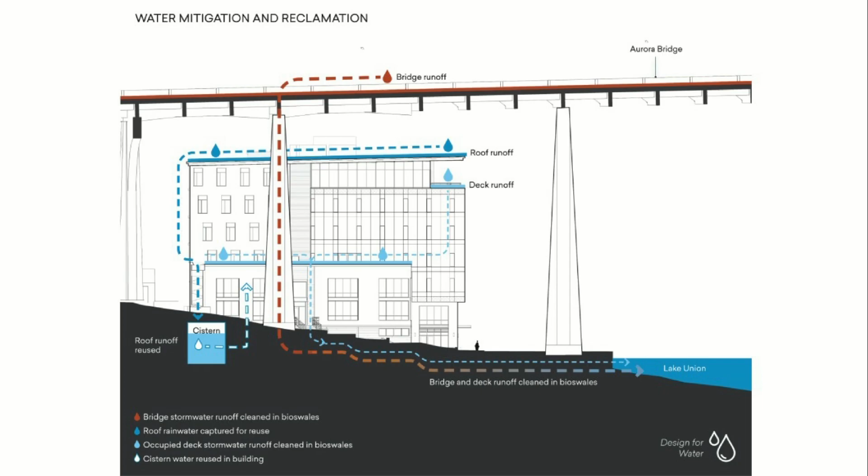So this is a diagram of water mitigation and reclamation showing the bridge runoff as well as deck runoff from the building entering these bioswales before entering the lake. This diagram also shows some of the water strategies in the cistern as well as some other sustainable building systems like beehives and operable windows and highly efficient mechanical systems.

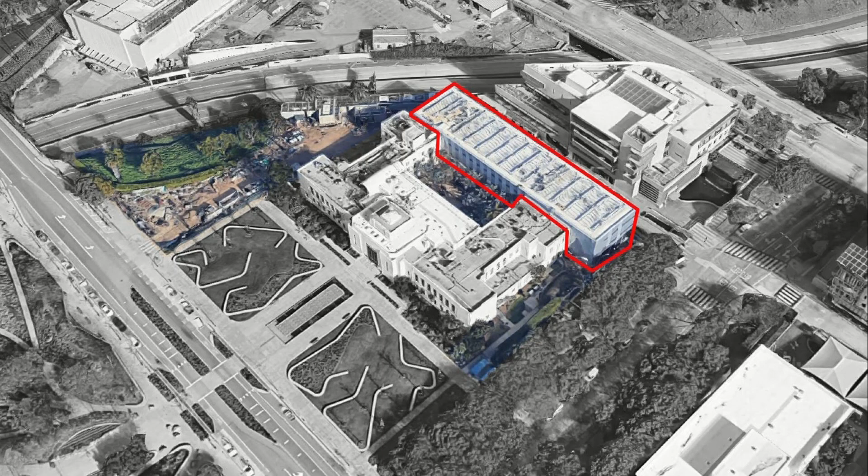And then closer to home, we're looking at Santa Monica City Hall East, outlined in red. It's a 50,000 square foot, 3-story addition to the historic Santa Monica City Hall. It is fully living building certified.

So that means that with regards to water, 100% of the project's water needs must be addressed on site. So it's all through rainwater capture and infiltration, as well as no potable water being used for non-potable uses, and all gray and black water must be managed on site.

These rigorous standards really pushed us to become the first in California to be permitted to convert rainwater to potable water, and also the first building of its scale in California with composting toilets. So this shows our pathway to get to net zero water. I think you really see composting toilets and rainwater capture as being really integral in that story.

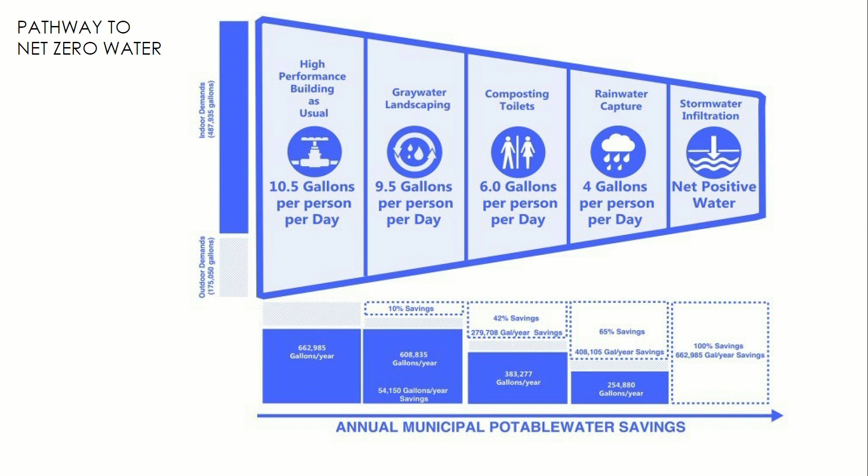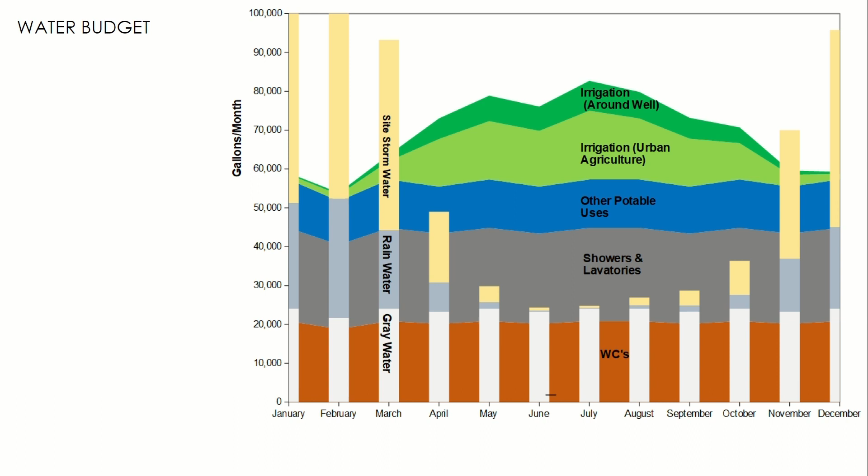And then these two graphs, this is sort of the before. So you see on the y-axis the available water - site stormwater, rainwater, and gray water. And then on the x-axis, the demand of toilets, showers, irrigation. And then once we take the toilets out of the equation, we start to get to net positive water. So for this project, the composting toilets are really the unsung heroes of the project.

So here, if you ever have a chance to go to the building, definitely go to the bathroom. The toilets are really fun, and they all stack vertically into these composters in the basement of the building. This is filled with worms and other organic matter that's turned over and eventually goes into an autoclave, which then deems it Class A compost, so you could use that for gardening.

So I think these two projects show us how challenging ideas of what infrastructure means, as well as what buildings can do, might not just be bad, but actually do good.

So they are capturing the rainwater that then goes into a below grade 40,000 gallon cistern, goes into the water treatment room, and then becomes potable water for the building.

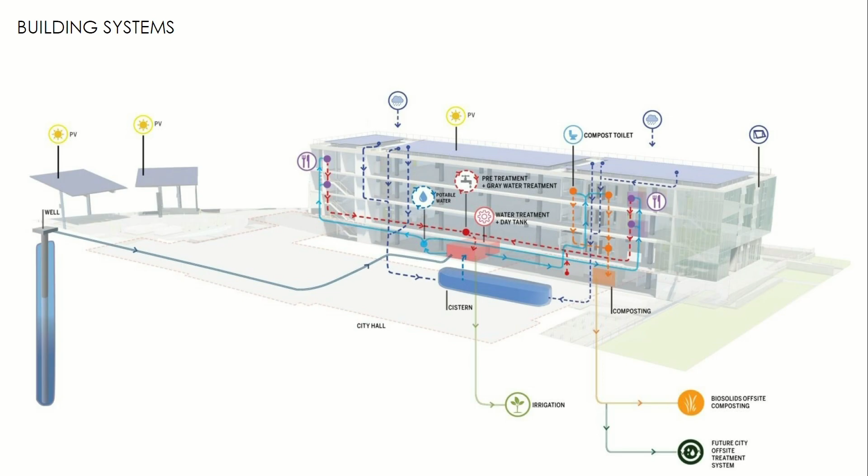All right, so now zooming to a different scale, going to Singapore, we're looking at a building that starts to think about water as poetry, as a phenomenon, as an icon. So this is the Jewel Changi building in Singapore.

It is 1.4 million square feet. It combines the programs of an airport transit hub with retail, with a botanical garden, and its centerpiece is this rain vortex. It is the largest indoor waterfall in the world, 130 feet, so like 7 stories.

Great for Instagram, and in plan and section it really demonstrates how the architecture and the landscape are intertwined. So you can't really imagine one without the other.

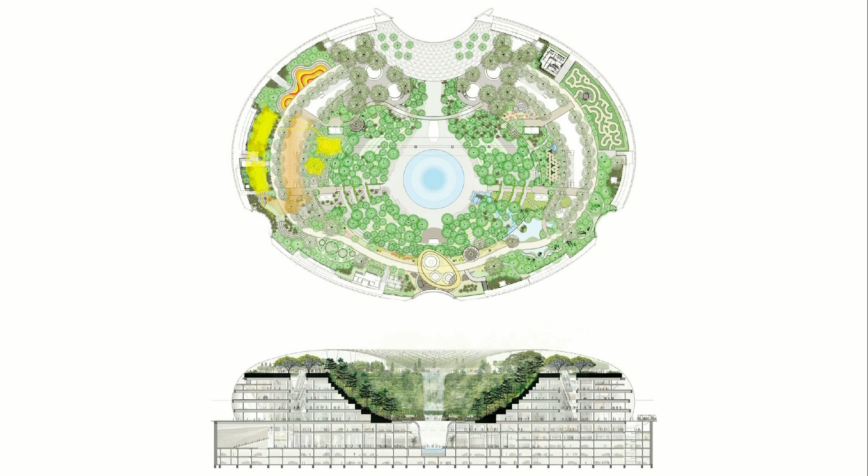So the way this works, it's recirculating rainwater. It's pumped to the roof and then free falls through this hole into a reflecting pool in the basement. And the ebb and flow of the waterfall goes to a trickle, and then at its greatest, it's about 10,000 gallons per minute.

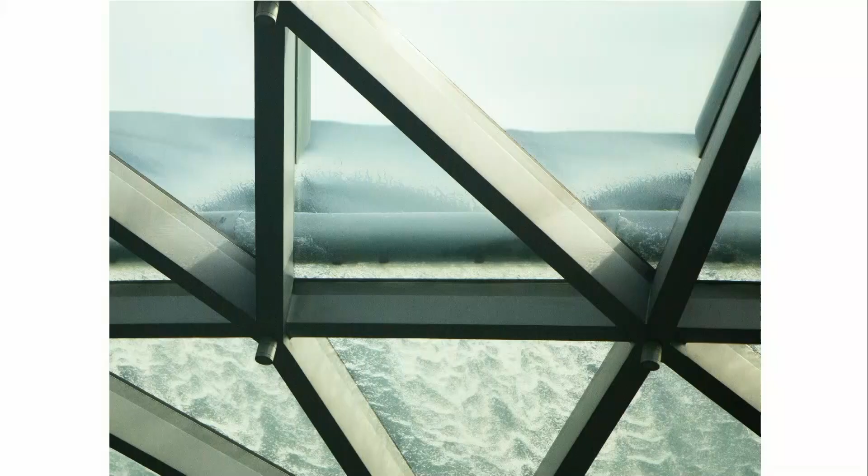This also aids in the cooling of the landscape environment and collects the rainwater again to be reused both in and around the building. Here's a detail of the facade.

So there are structural features built into the facade as a network of pipes and fins that then collectively gather the rainwater into this oculus and then distribute it perfectly into that circle.

This is a $1.2 billion structure. It really demonstrates, again, that poetry and universal quality of water that we all are attracted to, right? And it's collecting 50% of the stormwater runoff for irrigation and toilet flushing, and then the water is cooled enough that it can feed into the central plant to lower the ambient temperature of the building.

And then the last two projects address water as nourishment and sustaining us. So Vertical Harvest has locations in Wyoming, and then soon Maine and Michigan coming online. This one is in Jackson, Wyoming.

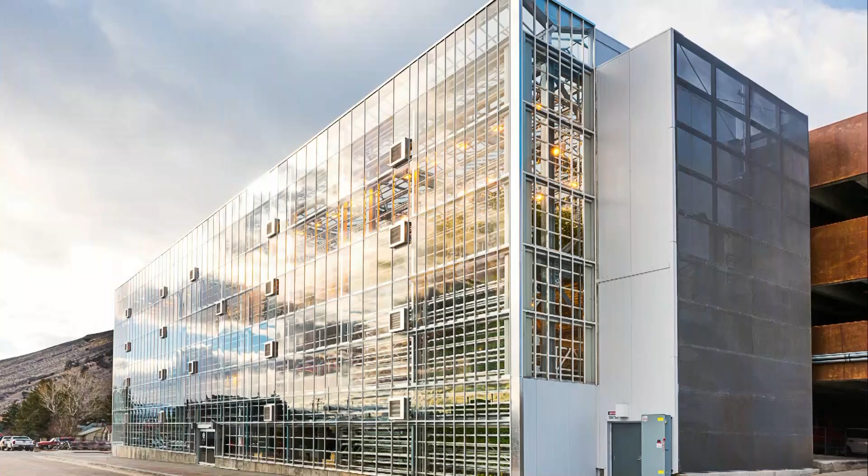It's a 30 by 150-foot lot next to a parking garage. It's the first vertical greenhouse in the Northern Hemisphere. And they've been in operation, I think, 6 or 7 years.

And they supply grocery stores, restaurants, and 3 states, producing food 365 days a year, despite the growing season being about 4 months in Wyoming. And they replace 100,000 pounds of produce that were formerly trucked into the community.

So this business model really challenges the notions of land use and what a farm is and what farmers look like, right? Half of their workforce is hired with disabilities, so that's another win.

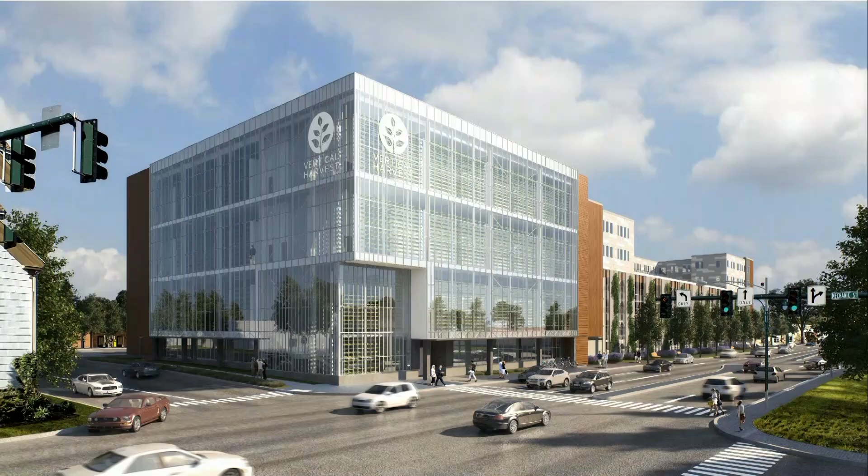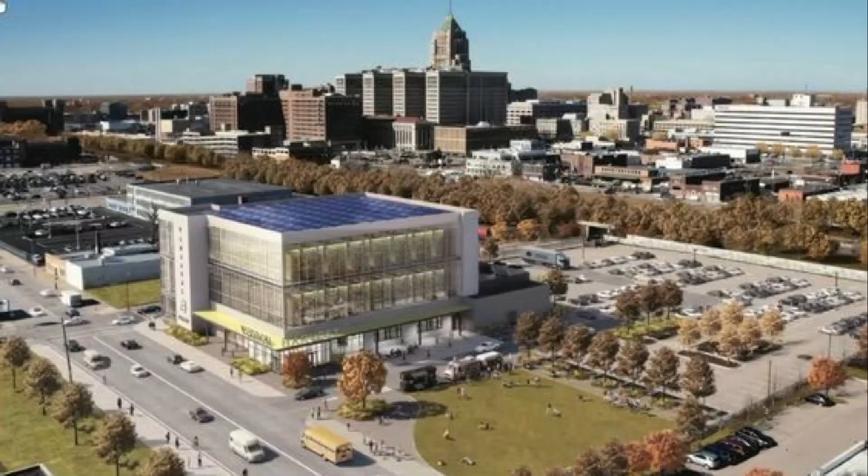And they're expanding their model nationally into other food deserts with similar short growing seasons. So near Portland, Maine, this is a 52,000 square foot facility set to open any day now, I think, slated to produce 2 million pounds of produce annually, providing food to schools, hospitals, and markets. And also in Detroit - this is really bad quality - 60,000 square feet and also about 2 million pounds of produce.

These projects really highlight that most of the produce we consume in grocery stores was harvested in a different country or state. It comes to us on a refrigerated truck, usually weeks after it was picked, so the nutrient quality and taste are diminished. But when you pick something and eat it 24 hours later, it's a win-win, creating year-round food production, local jobs, and reducing the carbon footprint of our food. With our growing population concentrating in urban areas, I think vertical farming is a really growing and exciting model.

Last project, similar themes but smaller scale and closer to home, is the Degnan Micro Farm. This is one of three micro farms that are part of Crop Swap LA, an agricultural institution whose mission is to grow nutrient-rich food in unused spaces like front yards. This one is a single-family lot, 150 by 50, and the story of the garden is in the backyard.

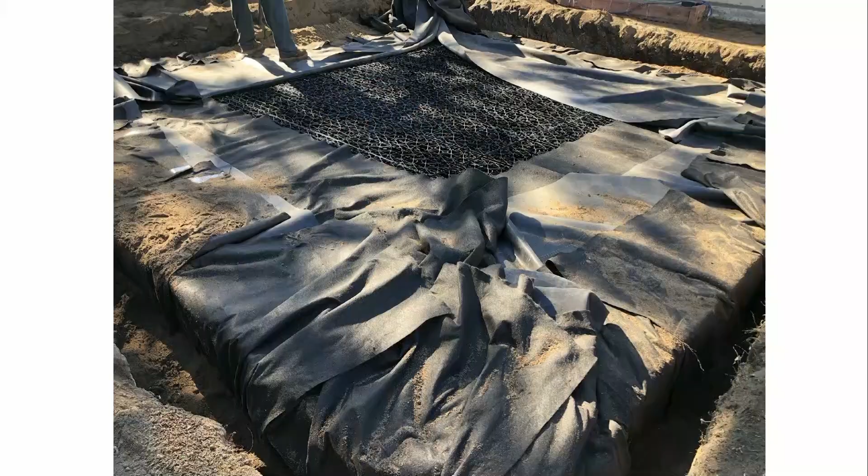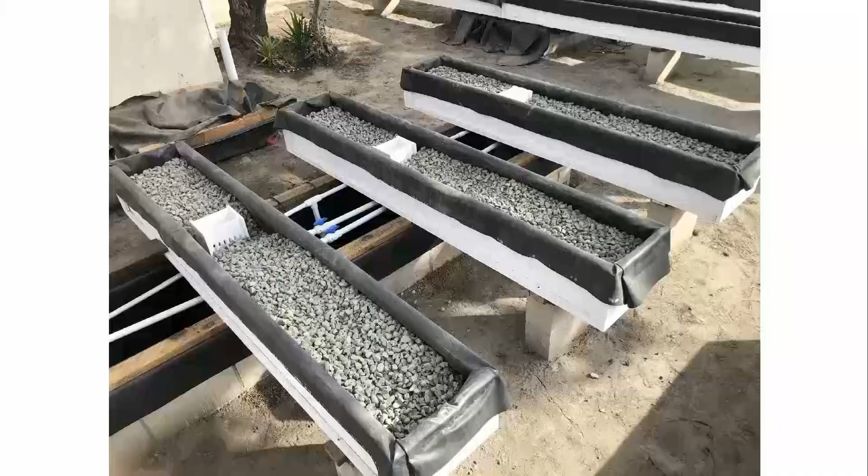They collect about 5,000 gallons in this below-grade reservoir, and above grade they built a recirculating waterfall filled with plants, lettuces, and pavers with permeable gravel that also collects rainwater from the property's garage and house. Then in the front yard, you see the terraponic system at work. So the whole farm, both this one and the other two, use recycled water and are solar powered.

Here we see these cinder block reservoirs with, perpendicular to that, the terraponic system. Terraponics is like aquaponics, but with soil, so you're getting the biology of soil together with the nutrients of the water. I think you can grow more plants with this system than aquaponics, and it's a little bit easier for less experienced farmers to grow with.

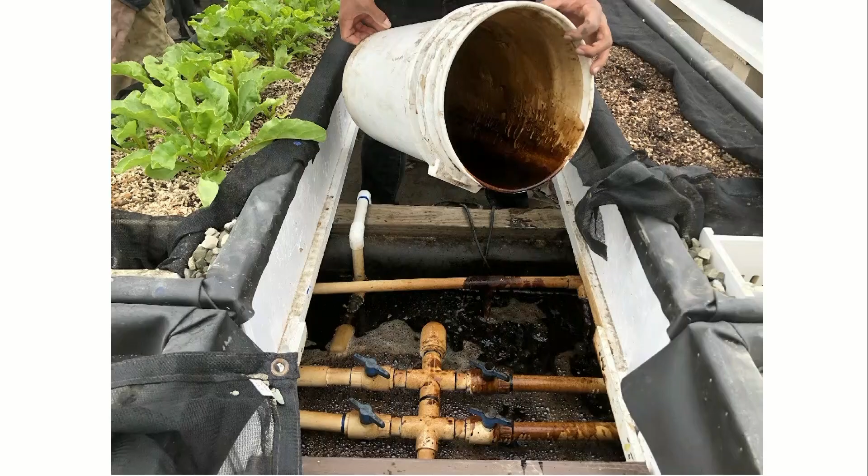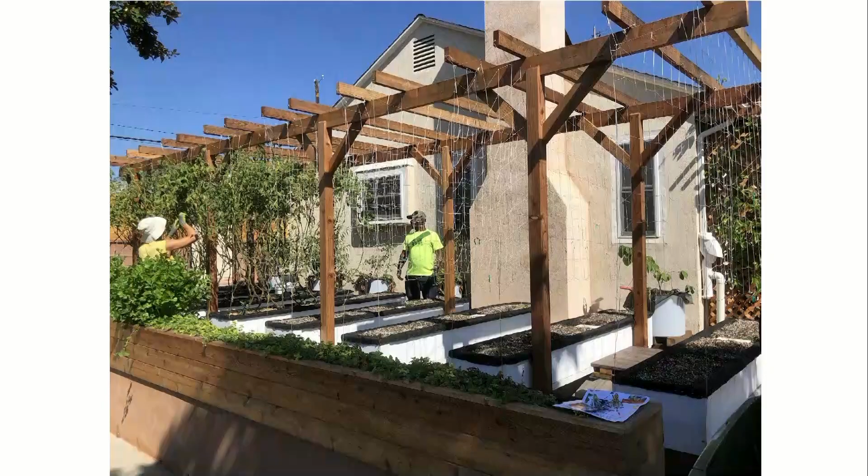In between each of the troughs, there's usually a cover, but here you can see the irrigation system as well as how they supplement with different plant-based fertilizers so they can calibrate the nutrition to the plant, both specific to what's being grown and where it is in its growing cycle. This is that same system, now with the vertical trellis.

Below, there's about 780 gallons of water being recycled, and it's always being tested to make sure it's appropriate. Also making more use of the vertical space in the front yard, they have this whole system made from reused rain gutters. It's about 8 feet tall, with I think 30 runs of it. This is where, right before harvest, we see lettuces, kale, and eggplants all growing.

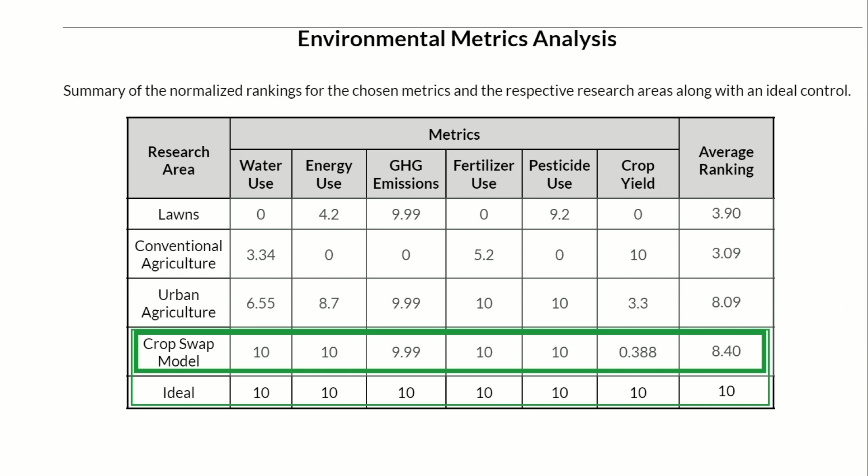This farm is producing food to feed 45 families, all within a 1-mile radius of the home. These are some metrics comparing the project, the farm, to conventional agriculture and urban agriculture, as well as comparing water needs between the microfarm and a conventional lawn. So it's kind of night and day.

So yeah, these 5 projects hopefully get us thinking about what we need our built environment to do, what our infrastructure and communities are capable of, and what we're looking at in the next 5, 10, and 50 years with our environment. So thank you.

Thank you, Mariam. It was great to see the range of scales, from a front yard all the way to an international airport and everything in between. It points out that if water becomes more central and part of the driver of development, it can go hand in hand to make something exceedingly successful. And yes, I think you said it was $1.2 billion for that airport space, but something tells me that economically, that environment will attract great economic value over time. It's just really powerful to see that water is beyond sustenance — it can really create special places for people. So thank you for sharing that.